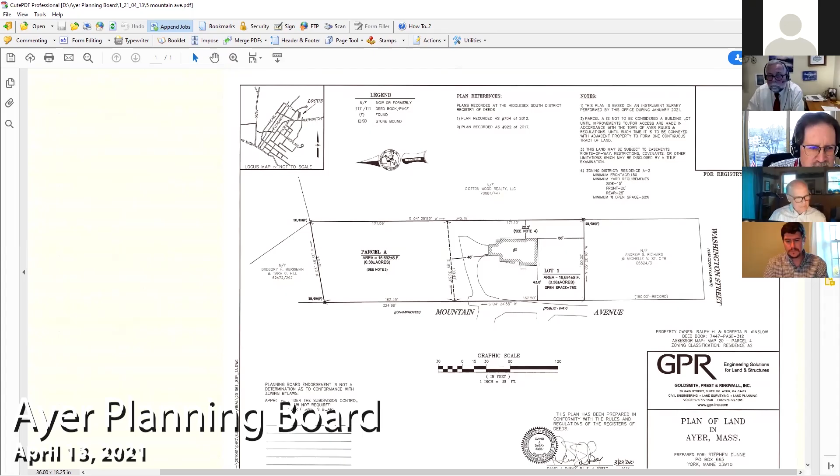And one other minor thing, we caught a few minor errors on the plan sheet. The minimum frontage in the A2 district is 100 feet, not 150 feet.

So we did quite a bit of research on this and tried to get a definitive answer on what the remaining portion of Mountain Avenue is considered. We have a document from, I want to say 1978, where Mountain Avenue is listed as an accepted roadway in Ayer. It was actually provided from your town offices. So we do have that. It is maintained by the town.

The remaining of Mountain Ave beyond the pavement, there's nothing saying it was discontinued. Typically, if it were to be discontinued and no longer considered a right of way, there would have to be documentation stating that the right of way ends right there. We cannot find such documentation, so we're under the impression that the entirety of Mountain Avenue is still a right of way.

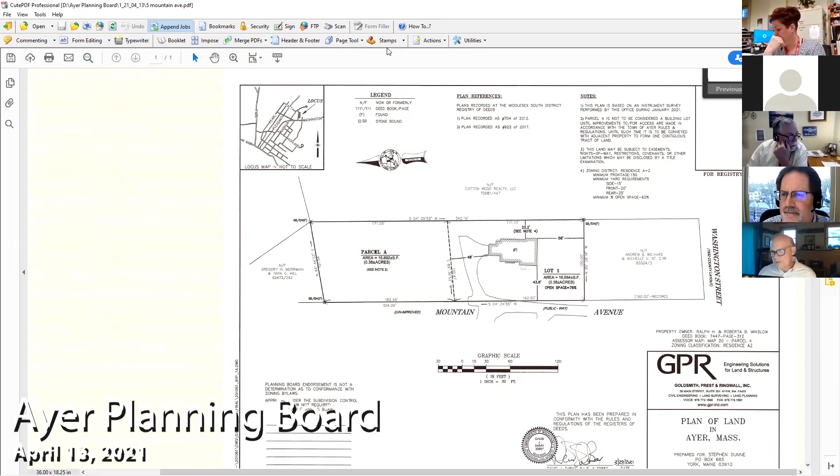You want to be upper right corner, lower? Where do you want to be? In the notes? All right, just that's good right there.

Okay, so just the use of the word 'public way' on the drawing, under our regulations, requires proof of public way evidence to be submitted to us. I don't even see the public way, the right of way, being shown in its full width.

This is basically showing land on one side of a guessed-about public way. We don't know that it is really a public way. There's no evidence unless he's provided it to the planner, and the planner didn't give it to us. So we have no package. That is a deficiency.

Our requirements also call for information, like 5-foot contours on the plan. There's no contours shown, or any other jurisdictional information that should be required. I don't know if there's some wetland there or brooks, something along those lines that's not shown, and basically the whole layout.

So I've got 2 or 3 things. The other thing is the scale of the drawing is wrong. It's showing 1 inch to 30, would require 1 inch to 40. And in the notes, Mark already pointed out the frontage requirement is 100 feet, not 150. We know that in A2.

But more importantly, for note 2, my preference would be that this note be reduced to what it really is, which is: parcel A is not a building lot, period. The other language inserted, 'until improvements and all the other,' to me has nothing to do with this drawing at this point in time, since we are allowed to approve the drawing as a parcel, which is fine, and a lot. But adding that language doesn't even belong in the plan as far as I'm concerned. So I would endorse the plan in the future if it comes back as the parcel with a clear note.

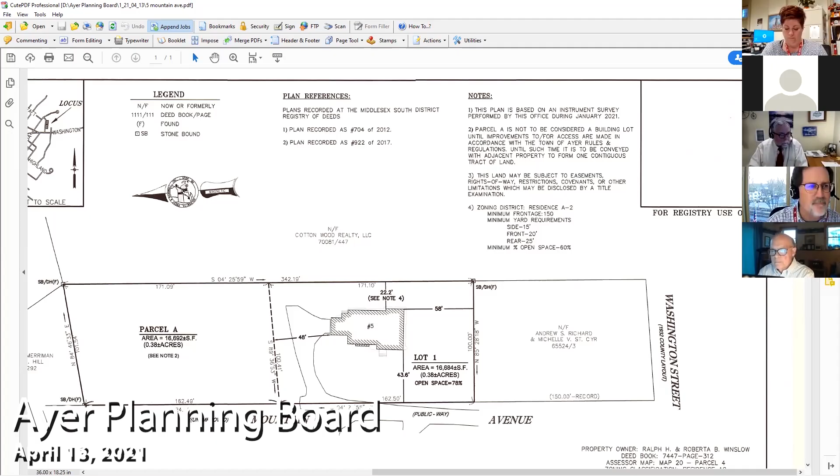So what's happening? Our client, and so in the future, we want there to be the ability—the reason it's not a buildable lot is because it doesn't have access via its frontage. So in order to make this a buildable lot, you need to go through the subdivision approval process, which now requires an open space development, and you need a special permit to not do the open space development. So there's a lot more process and meetings to get this roadway extension through the subdivision process. What our client asked us to do is create this parcel to be able to market it and say, here's—you still have to do X, Y, and Z, but this can become a buildable lot with certain steps that you have to take.

Do not agree with that statement at all. We're not in the business of signing off on a plan with the possibility that the developer can market it with that kind of language or thought process. I think it has to be clearly stated that it's not a buildable lot. It's a parcel, and that's it.

Could I just, I'm sorry to interrupt—could I just complete Mark's thought and answer Jonathan's question? It's not a buildable lot, it's a parcel, because the paper street is not constructed, there's no means of access to make the frontage viable.

The reason that we are talking with the DPW regarding sewer and water about this parcel is that the existing house on 5 Mountain is currently served by an on-site septic system, which is found in failure. To get sewer for sanitary services provided to the existing structure on what's now, or what we're looking to be called Lot 1 of the 5 Mountain Ave structure, we're proposing an E-One ejector pump, a low pressure force main that will go within the paper street version of Mountain Ave and actually go and connect into the town sewer.

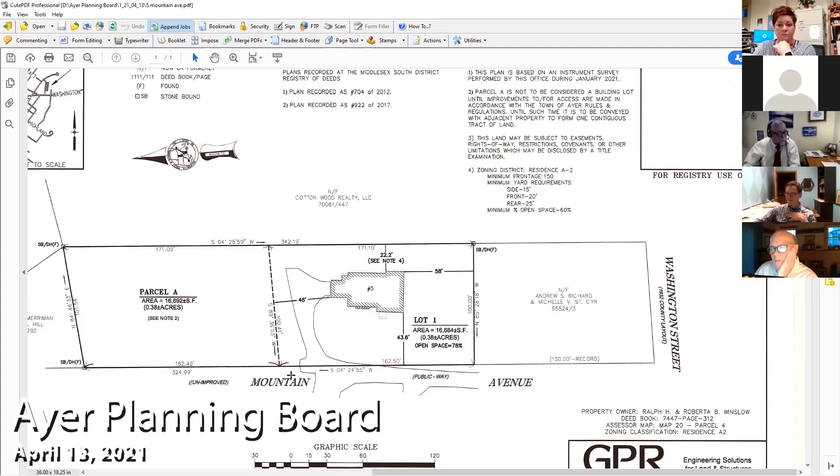Next on our list is the continued public hearing, special permit for 1 Nemco Way, Catania Spagna. Can you undo the screen, Jeff? Thank you. You know, I've only had like one Zoom this week, so I'm not in my best form. Good evening, folks from Catania. How are you tonight? How's everybody?

Fantastic. Do we need a motion to open the continued hearing and site plan review? Yes, I would think that would be a good idea. You want two, we have to do two, one for the special permit and one for the site plan review?

I make a motion to continue the public hearing for the special permit for 1 Nemco Way, Catania Spagna Oils. Seconded. Moved by Mr. Krantz, seconded by Ms. Murray. Hearing no discussion, Mr. King, how do you vote? Aye. Ms. Murray? Aye. Mr. Diskin? Aye. Mr. Krantz? Aye. Chair votes aye.

Because they're probably going to end up being discussed at the same time, Jonathan, would you make that also open? I'd like to make a motion for continued site plan review for 1 Nemco Way, Catania Spagna Oils.

Seconded. Moved by Mr. Krantz, seconded by Ms. Murray. Hearing no discussion, Mr. King, how do you vote? Aye. Ms. Murray? Aye. Mr. Krantz, how do you vote? Aye. Mr. Diskin, how do you vote? Aye. Chair votes aye. Mark, do you want to catch us up, or should I do the overview?

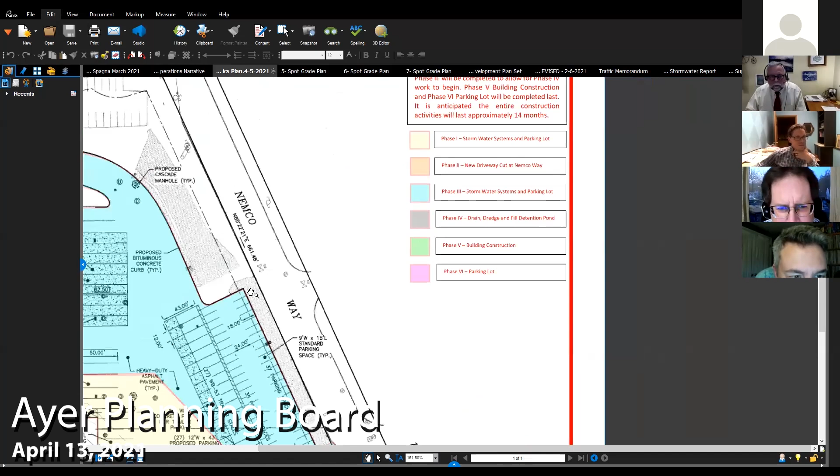It walks through six phases. Phase 1 would include construction of the stormwater system and parking lot area. Phase 2 would be doing the new curb cut. Phase 3 would be continuing construction of this lower portion, so that isn't set in stone, in order to handle phase 4, which would be diverting the drainage from offsite flow into the new system, so we could continue with phase 4. Phase 5 would be dewatering this, and then starting construction of the building addition. And phase 6 would be just wrapping everything up with the driveway area once the building is in place.

Do we have anything we want to discuss on operations? Does anybody have questions about that portion? No. Okay, and we'd like to open up the floor to comments from the planning board.

We're hoping that, with what we've discussed at our site walk, we could move forward with an approval contingent on us addressing DPW's technical comments. The rest of their draft letter was more about stormwater, breaking up the offsite flow into smaller subcatchment areas so we have a better idea of what's going on with our stormwater calculations. So we'll have all that to submit to DPW and to the planning board once we get that official letter. Thank you.

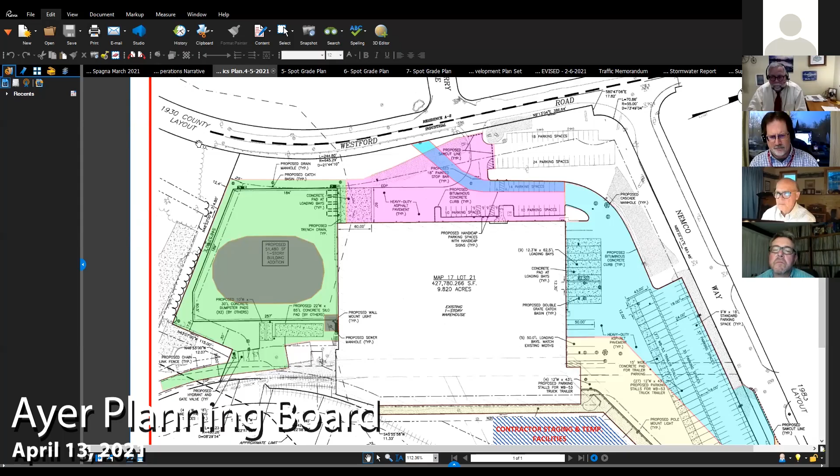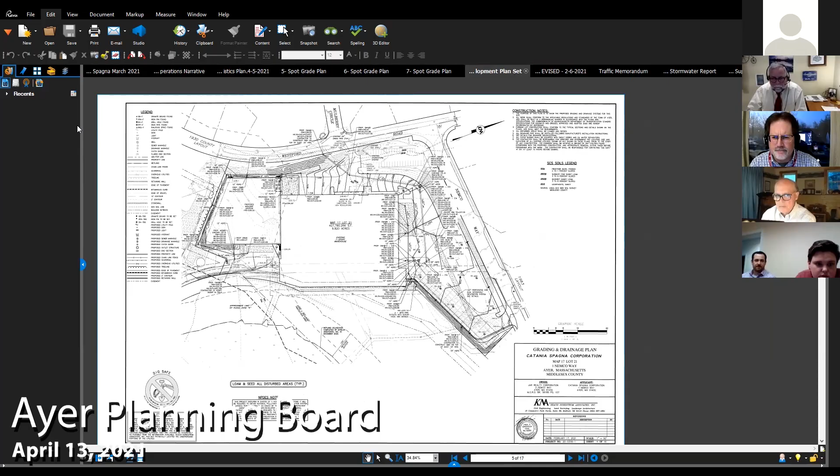It's the distinct, Y-looking feature. I don't have the aerial to pull up right now, but it was determined that compensatory area was developed inside the railway loop, approximately down in here. Let me pull up that plan. Give me one second. Here we are, let me change the sheets. I'm just going to zoom in here, it'll be the easiest to see. So this piece of land here, this parcel, that's where that pond was reconstructed inside this railway loop.

So between that, and we were also able to dig up calculations for the size of this pond to handle stormwater, between those items, the board voted that this pond is in fact stormwater and not jurisdictional. And they approved us conditionally for our notice of intent. There's some technical stuff, we don't have our DEP file number, so they approved us to get that and address any comments DEP might have.

We haven't seen anything yet, but Epsilon is working on that. And Ken, I sat in the bleacher seats during that meeting. There's basically no DEP number assigned yet, and they're waiting for comments back from DEP.

Regarding the pond, I also think Joanne Christoph found a document in her files that coincides with what Bridget just explained happened at Nasoya some years ago, that actually lists it as a detention system, not a jurisdictional pond. So it went very well, as a matter of fact. I thought it was going to go in a very different direction, but it didn't. So, all things considered.

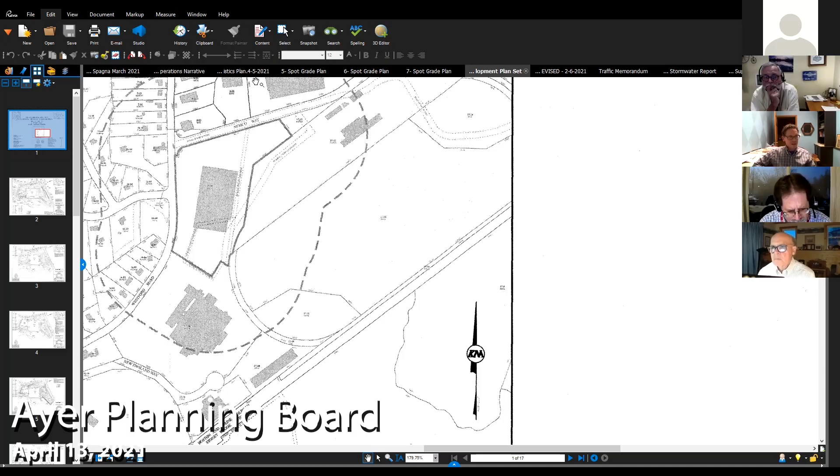It was shown, if you could go, Bridget, back to your 6-phase drawing there. You showed in the bottom, the blue hash there, the contractor staging temp facilities. I think that's not Catania's property, and so there's just going to be questions about access to that property. It's restoration because it's a big open field right now. As we get into the details of the site work, that's some of the things I'm just highlighting.

I can actually speak to that quickly. Scott Whitney with Concord Building Services. We've executed a memorandum of understanding with the abutter, Ardent Mills. Happy to forward that over to the board. They're going to allow us to use that area of their property for staging. We have an agreement with them that we will restore it to its existing condition, and it will just be to keep temporary facilities and some construction materials out of the way, because you're right, it is a very busy site. So if it would help that we forward that memorandum of understanding off to you as a supplement, we'd be happy to do that. I think that would probably be very helpful.

One of the things we typically ask for early in the process is that you actually have an agreement in place to work on the land you're proposing to work on. The last thing we want is to say go for it, then have somebody say stop - that's a headache for everybody. We just saw the A&R piece where ultimately they don't have control of that land.

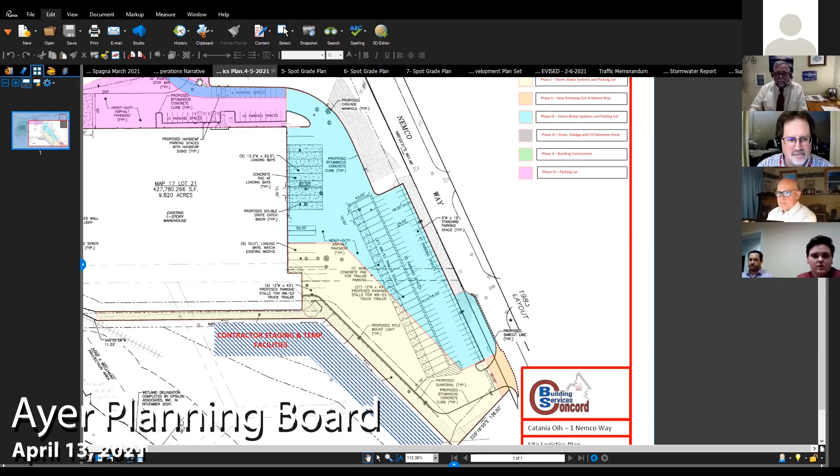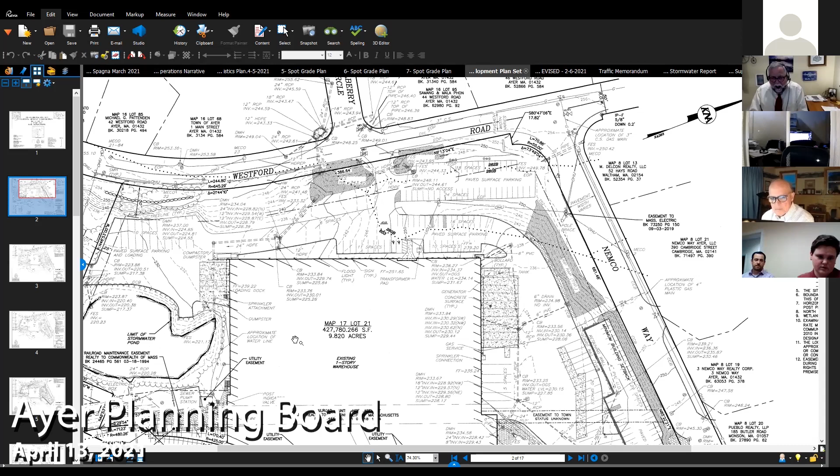The major discussion yesterday was about the stormwater design and how it would operate. I'll pull out the grading plan and walk everyone through that. As it stands today, stormwater from Mulberry Circle is collected in a series of catch basins and piped down to a small depression, just across the street of Westford Road. It's piped underneath the roadway and makes its way down into this stormwater pond behind the building as it stands. And then on-site flow, some flow is directed to this pond.

Additionally, this side of the building is directed to an infiltration pond in this corner of the property. In the proposed condition, we would be routing that off-site flow and the existing flow from this area to a new proposed detention and infiltration system. It's a dual system. This portion over the existing infiltration basin will remain as infiltration, lined with a geotextile fabric. The upper portion of the detention system would be lined with an impermeable PVC liner to prevent any infiltration into the soils in this area.

So we would be upsizing the pipe from Mulberry Circle, where we collected on our property, to a 30-inch and then down to a 36-inch, just to increase the capacity on our site at least. We would be adding some treatment with the proprietary unit separator. As it stands, there's no treatment for that flow prior to it entering the existing stormwater pond. We will also be adding water quality units for our stormwater runoff as well.

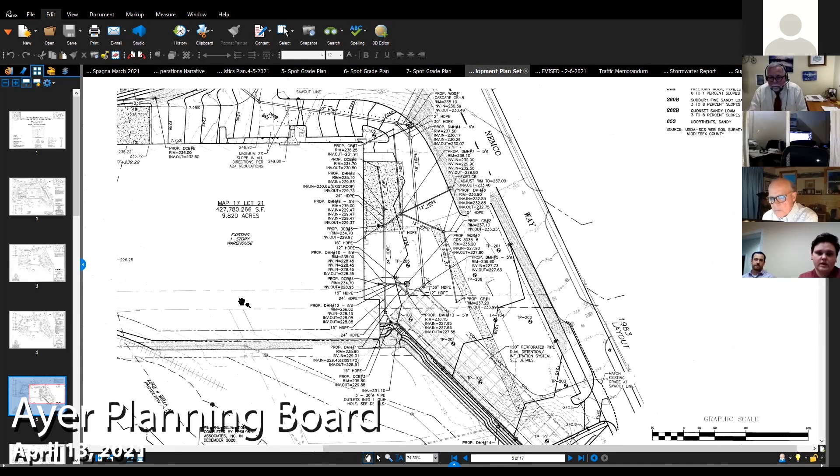So this is one here for this portion of flow, and then there would be one over here as well that would handle the driveway flow and the building addition, and water collected in a catch basin from this area as well. This utilizes the existing stormwater outlet. It's a 24-inch pipe that goes to the wetlands. We would construct a manhole over that line. And then the outlet for the detention infiltration system will be utilizing an existing 18-inch pipe.

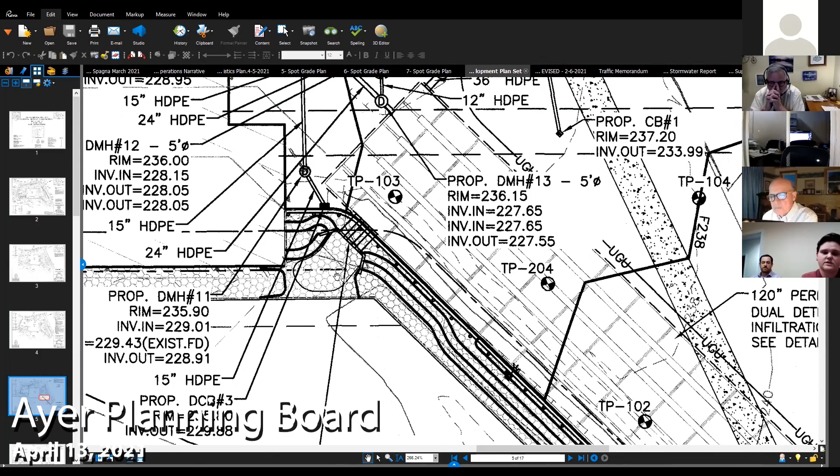And then overflow would be through a series of three-foot diameter pipes into a scour hole. A scour hole is just a depression in the ground lined with riprap stone to dissipate flows out of the system. As it stands, there's an existing swale with riprap lining, small stone for the most part. We'd be widening this to 14 feet wide and enhancing that stone, upsizing it to further dissipate flows and allow for infiltration over the length of the building prior to it infiltrating and discharging into the wetlands.

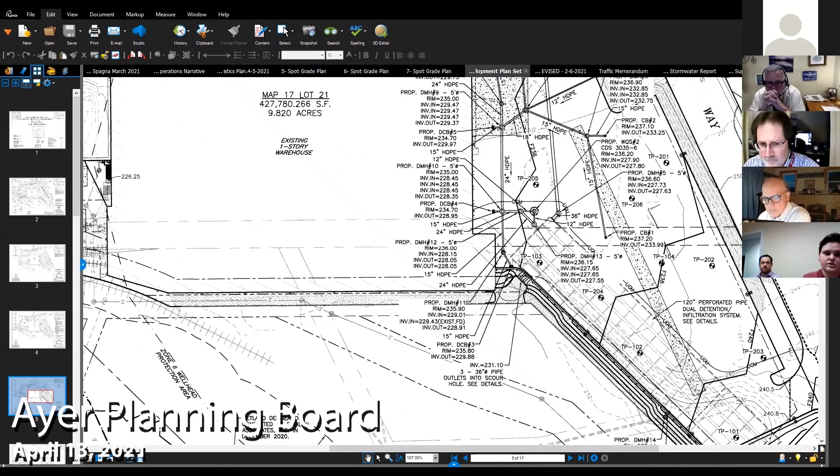So that's the bulk of what we discussed yesterday. Additionally, Dan Brackett with Catania touched on what operations look like inside the building. If we want to go into that, we can.

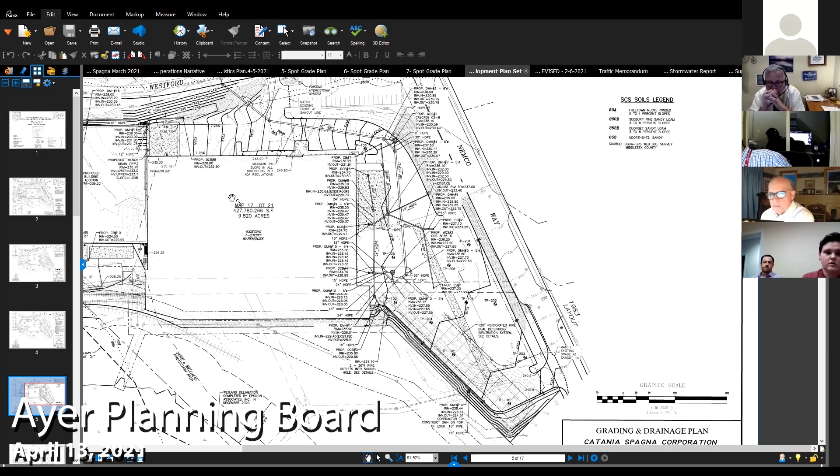So essentially, they manufacture their own bottles on site currently with a machine that uses preforms. Essentially, it's like a balloon, a little plastic tube. It blows air into it and it forms to a mold that creates the bottles they use in bottling their various oils on site. The building addition would allow them to bring in more of those machines to eliminate some of the bottling they have to bring in. As it stands, they're not able to manufacture their own bottles for every single type they use. So they have to truckload in specific types of bottles to distribute their oils. This would allow them to eliminate some of those trucking needs that they have as it stands today.

Dan or Joe, is there anything else you want to add about operations? So the only thing to add to that, Bridget, thank you. That was fantastic for not knowing a lot about what we do. You did a great job. Oh, the tour helped.

So the only other thing is that there's some filling processes that we looked at when we went through the plant. We would have very nearly identical or very similar filling processes in this space as well. So we take those bottles and there's filler, capper, labeler, and then case packer to convert those containers to saleable items for consumers.

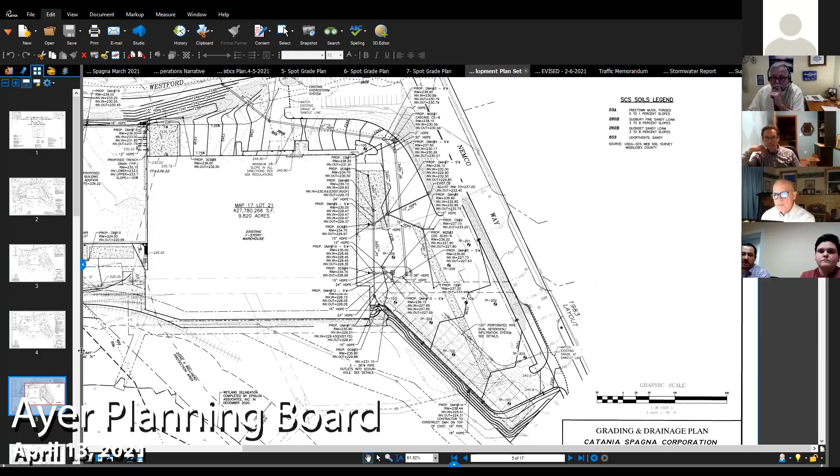So this size pipe is actually used at airports a lot, even larger size pipe. Yep, so it's something that definitely exists, and we could supply project examples if asked for. Beyond that, that was why we made an important change down to a 96-inch pipe, mainly due to their recommendation based on shipping, which is a big consideration depending on where you are, especially in New England, there are some difficulties and logistics to work around. But these guys are the leader, really, in big diameter pipe.

So it's certainly not anything new to them, but we understand it's not every day you see a system quite like this either. So we'll work through all of that, and between now and the next hearing we can come up with some examples, maybe some pictures of construction sites in other areas using this type of thing, just so you can get a feel for what it's going to look like through the process.

Yes, thank you very much. Just one last thing, as Jonathan indicated, we take this job very seriously. We're members of the community. I've been at the plant for 12 years. The company's been in business for over 100 years. We're not doing all this work because it's fun. We're doing it because, one, it's necessary, and two, we plan to be here for a very long time. So we do it right, because I don't want to have to deal with problems later. I think hopefully when you guys came through the plant, you saw that we attempt to do everything to the best of our abilities. Thank you.

Seeing no further comment, why don't we close this continued public hearing and site plan review, please, and then we'll take care of a couple of logistics for the evening.

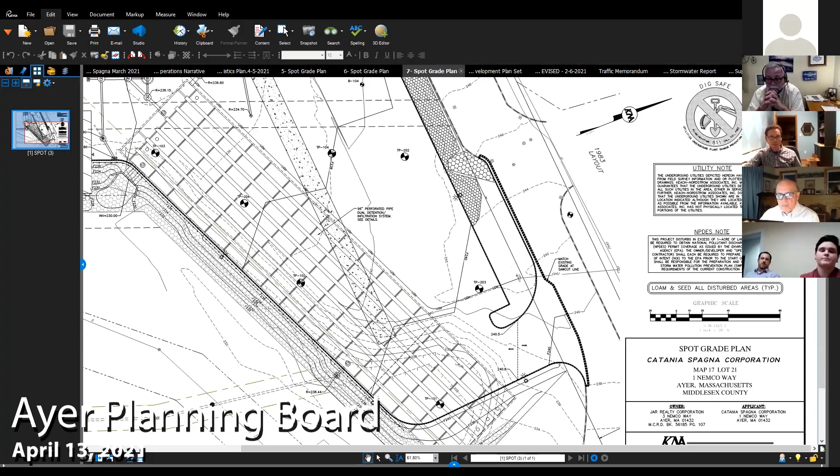Mr. Krantz, you need a motion to continue to the next meeting, correct? Yes, I make a motion to continue the public hearing for the special permit for 1 Nemco Way to our next scheduled planning board meeting on the 27th of April. Do I have a second? Moved by Mr. Krantz, seconded by Ms. Murray. Not hearing any discussion, Ms. Murray, how do you vote? Aye. Mr. King? Aye. Mr. Diskin? Aye. Mr. Krantz? Aye. Chair votes aye.

I make a motion that we continue the site plan review for 1 Nemco Way, Catania Spagna Oils, to our next planning board meeting on April 27th, 2021. Seconded by Ms. Murray. Ms. Murray, how do you vote? Aye. Mr. King? Aye. Mr. Diskin? Aye. Mr. Krantz? Aye. Chair votes aye. Thank you very much, ladies and gentlemen from Catania Spagna, look forward to seeing you soon. Thank you very much, thanks.

Mark, do we have time for a town planner update tonight? Wow, but I actually don't have anything. That's okay, maybe next time. That's fine. In all fairness, Mark has been swamped the last 10 days. We've done our best to keep him on, but it's really the world that's been keeping Mark on his toes, with things just coming in, questions about this business and that business, and inquiries. Yeah, it's been very busy.